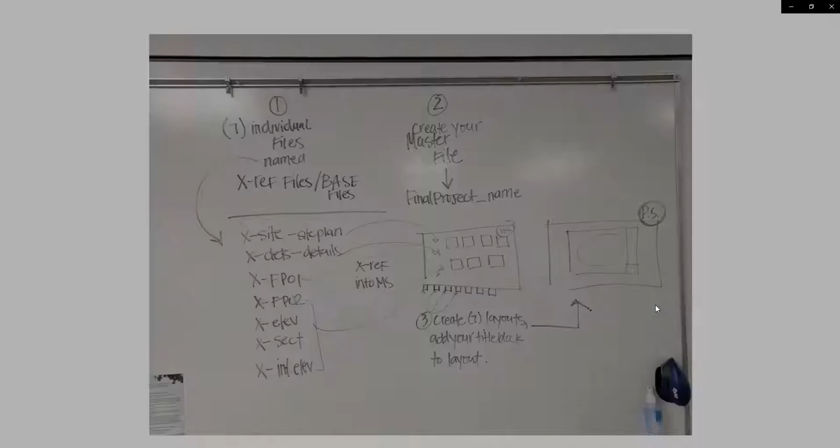Master file construction. This is just a graphic I like to put on the board before we start the final project. But I have it here now, so let's see. I'm going to hit OK. There we go. This is a little diagram of how your final project needs to work. And it won't make very much sense right now, but it will after you watch the external reference video, okay?

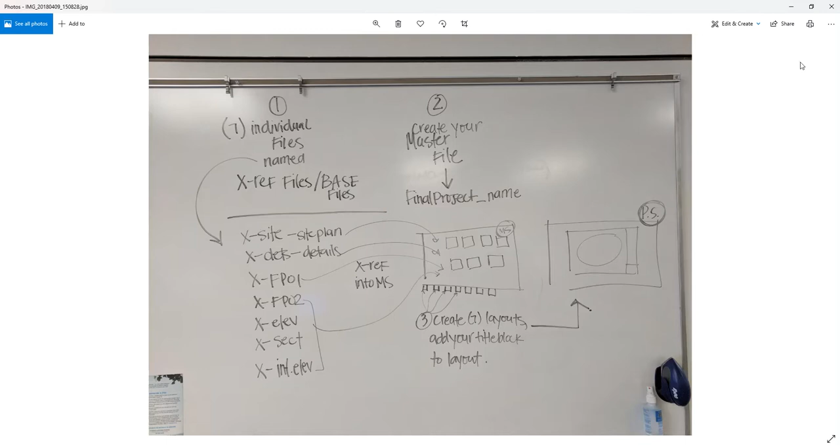All right, so I'm going to go back to our final module now. I'm going to change all of my prerequisites here. You see the prerequisite for the hatch module is 12. I'm going to change the final project to have a prerequisite of number 14, so I'm going to make you watch this video before you start your final project.

Your final project is going to be to create and draw a small set of construction drawings. There's a few things in here I want to show you: we have final project instructions, final project drawings, an image for the cover sheet, and your LaserJet CTB file just in case you've lost it.

Here's some instructions. Follow them exactly. I'm going to open these up in a second. You can print your final project from the PDF I've given you to an 11 by 17 inch page, on our printer over here—that's why I just had Jameson change the toner. It will be to scale, so if there's a measurement you're questioning, you can measure the printed version.

You're not allowed to work together on this project, although this all must be your own work. I don't mind if maybe you're working in the lab and ask a quick question, like where to find the design center or what command makes a mirror copy. I don't mind small questions, but this final project is really an out of class final test. I want you to use all of the AutoCAD skills you have to generate this on your own. You can come to me and ask questions, but I really want this to be mostly your work.

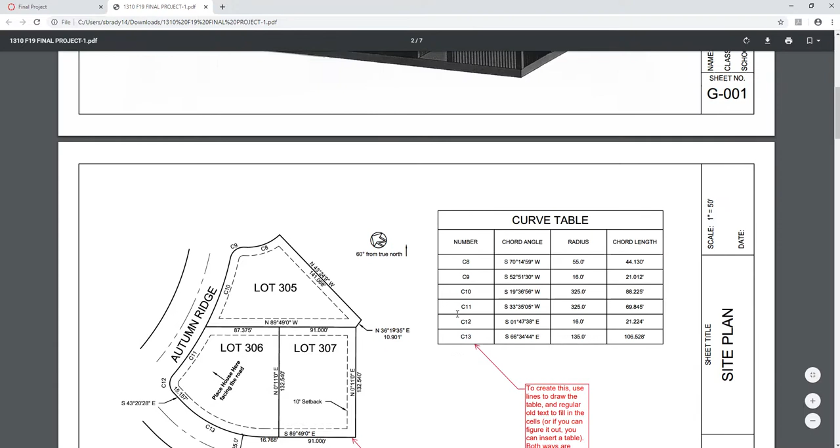You're going to draw all of these lot lines, and you're going to add all the text. Then you're going to draw this curve table. The curve table you can draw using lines - these are just regular old lines - and text. Or you can add a table if you can figure that out in AutoCAD, which, hint hint, a table is very easy in AutoCAD. I'll show you that in a second.

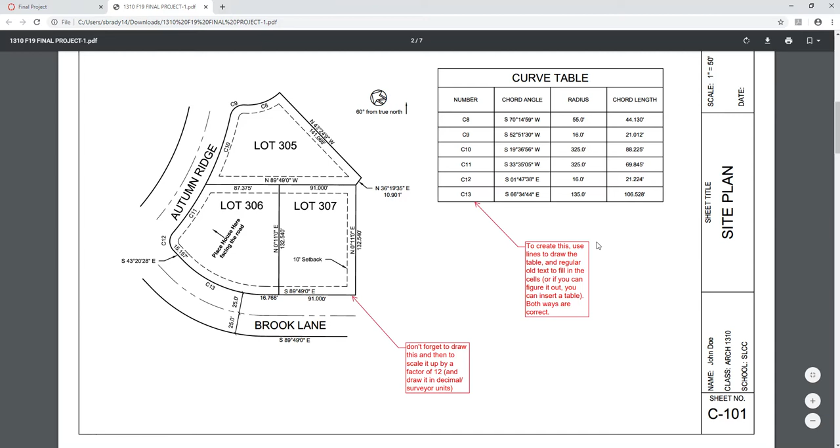Okay, I've given a little hint here too. Don't forget to draw this and then scale it up by 12, right? Here's the floor plan that you're going to draw.

You don't need to draw this door schedule here. You don't need to draw this text, and you don't need to put these drawings here. I don't think you need to have those. Just make sure you get this floor plan drawn.

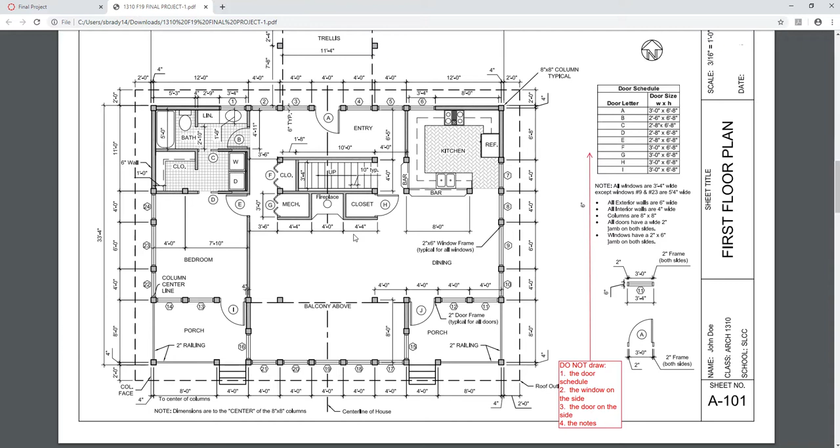This is the lower level floor plan. Here's the upper level floor plan. An exterior elevation. Here's a section. And then we have two more small drawings, an interior elevation here, and one more smaller floor plan here, an enlarged floor plan, okay?

Now you might be panicking, but let me just ease your mind here, okay? I'm going to go back to the final project module. I haven't left you completely alone. I've given you a lot of drawings to follow here, okay?

So number 1, you're going to watch the external reference video. Number 2, you're going to start at the top here. Here's some hints, but you're going to start at the top, how to draw exterior and interior elevations, right? So that you have that.

You're going to watch this video. Then you're going to watch AutoCAD Final Project, how to construct your master file. This is going to get you started on the final project. AutoCAD Final Project, drawing the exterior elevation.

AutoCAD final project, drawing your floor plan. Actually, let's switch those. Draw your floor plan and then your exterior elevation.

Okay? Yep. Whenever I click on those, they actually don't show up on my canvas. These don't. Oh, are they? They don't. No, they have like a little paper with a sad face on it. Oh no. Okay, I'll check the links because.

Oh, maybe click on this right here. You might have to go to YouTube. Is that the problem? Maybe. Okay. Yeah. Did that work? Okay. Okay, I think yeah, okay.

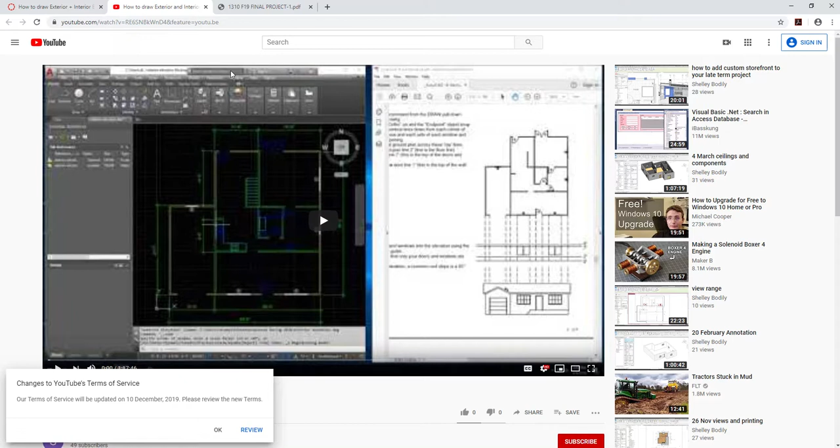So just make sure to click on this up here, how to draw, and it will open up in a secondary window. But if you watch all of these, all of these things are going to run you through how to create this final project.

Really, I do the same process every single semester, and every single semester everybody does really well with this final project. But let me just kind of show you again, the first one is to do your external reference video. Watch that. Hints about the final. There's just one hint in there so far.

In one of the videos, we've done the blocks a little bit differently in the attributes, not quite converted to annotative AutoCAD. So if you see me creating text, dimensions, or attributes and they are not annotative, ignore that and just do it the way we've done it in class. Okay, so that's one comment I want to make.

Let's go back to our module here. You're going to start here, and this is going to show you how to XREF your entire master file together. Okay, so these are, I think, about an hour long.

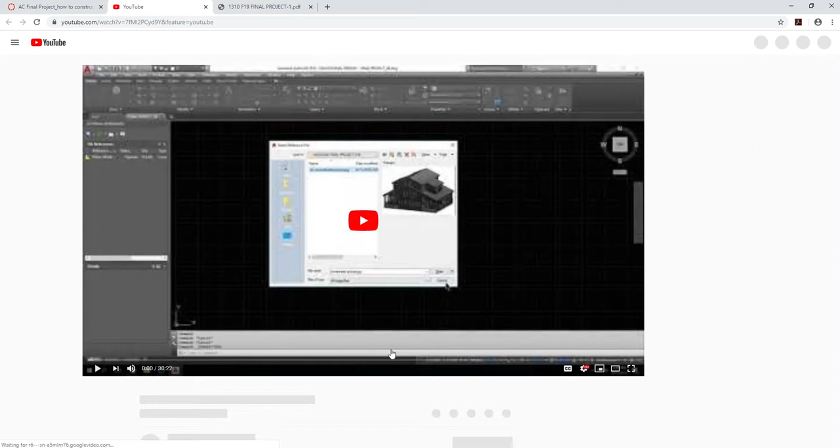Maybe a little bit, hour and 20 minutes. This one's 30 minutes. It didn't take too long. But this shows you how to XREF all of your files together to get your master file going. Okay, so step 1.

Step 2, let's go back. Okay, now that I have my master file constructed, how do I draw my floor plan? So they have an hour, I think this one's actually almost an hour and a half because I point out a lot of things. Oh no, it's the next one. This one's 58 minutes, I trimmed it a little.

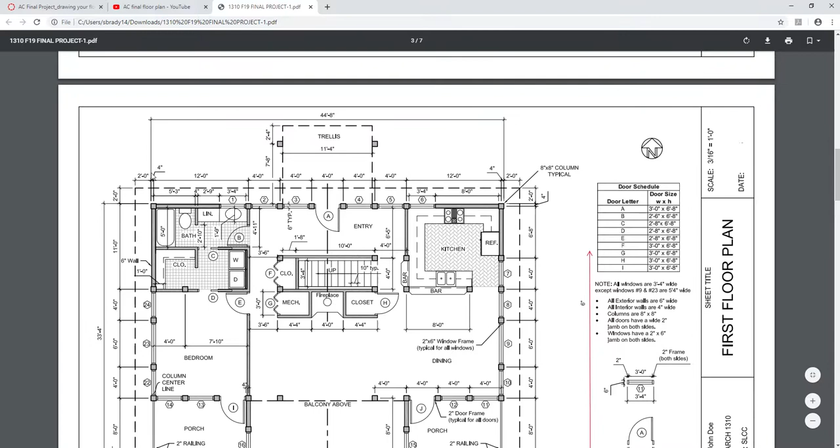But I start basically showing you how to go about not only drawing this floor plan, but thinking about how it goes together, okay? Because this project, if you look at all of the different dimensions in the project, it's based on a 4-foot grid, okay? And so I'm going to show you how to draw that using that 4-foot grid and how to think about going about drawing this, okay?

And then we have the exterior elevation, right? That one probably panicked everybody. So how to draw your floor plan and then how to draw your exterior elevation. And this will help you.

Oh, I have one more video to post that's not on here. So, hey, how do we go about drawing this? Well, once you have your floor plan drawn, drawing this is very easy, okay? So I'll lead you through that.

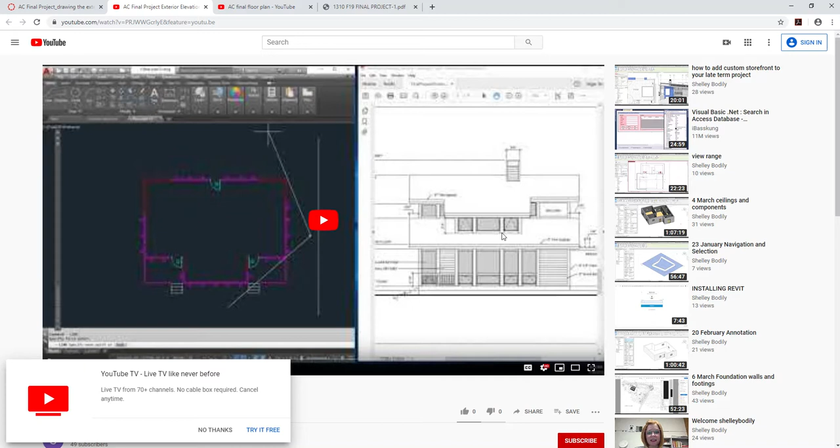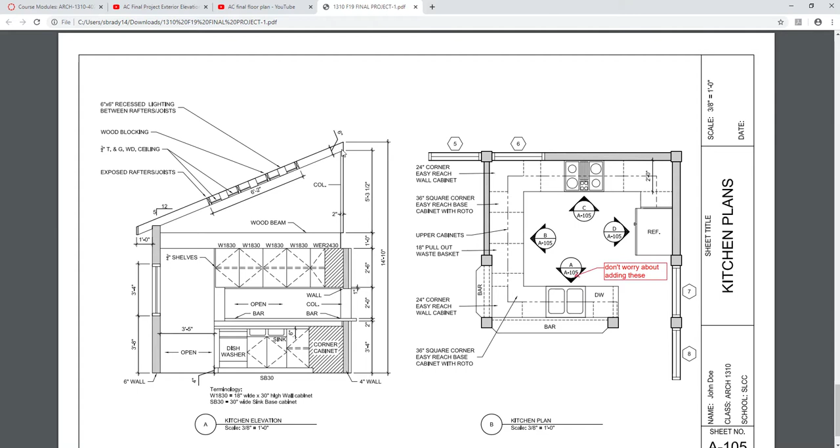And then I actually have one more video I'm going to post on here. It's kind of the final in these, but it talks about how to draw the interior elevation, and how to go about drawing these two things, okay? So these videos, they don't complete every task, but I will show you how to get started, what layers to use, and then get the basic outline of most of them done so that you're on your way, right? And then you can finish it up, I think, fairly easily, okay?

Does anybody have any questions on any of this?

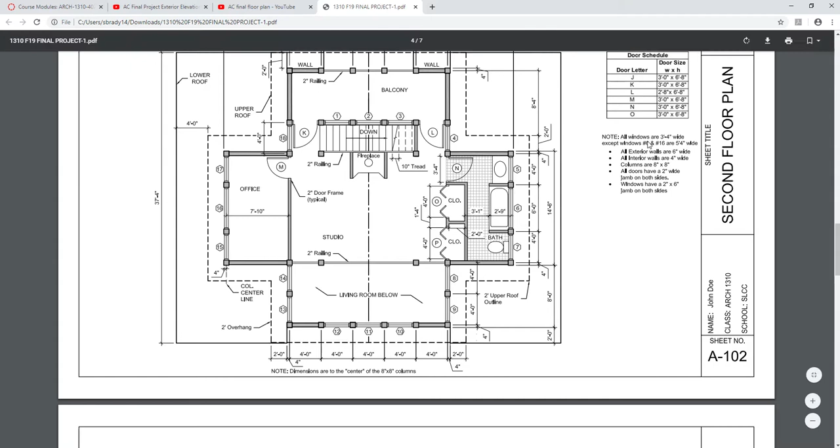Madison, looks like you have one. I just wanted to make sure on the lower elevation, do we also need to draw the chart? No, these right here? Yeah, nope. I just want to make sure because it doesn't say anything. Yep, I wasn't sure. Nope.

And I can make that clarification. You don't need to draw any of these notes over here on the side. I'm fine with you focusing on getting the architecture done, right? So don't worry about doing any of these. Yep, none of those notes.

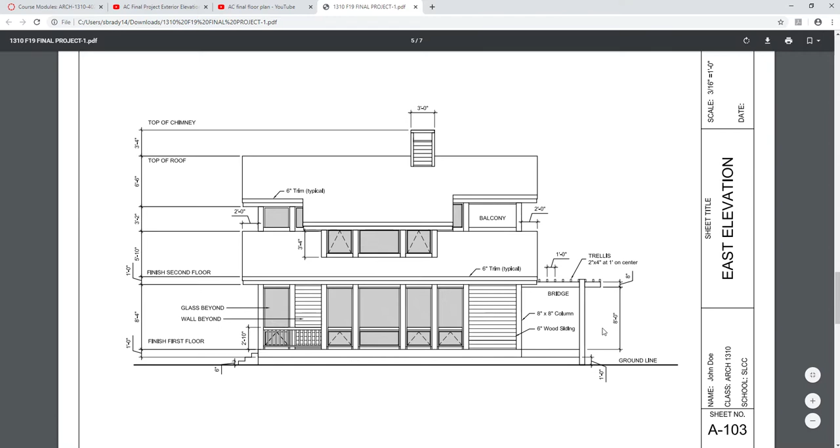But you will want to add these dimensions in, and these little notes right here, we'll add those in, right? And you will add all of these in using leaders, okay? And you don't need to add these markers in. We don't need to do that.

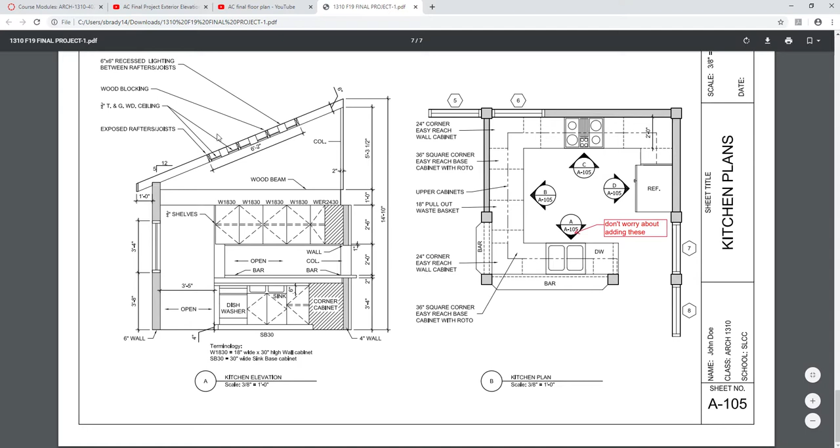And I talk about this in the video, but this really is just a copy of the floor plan, right? So you're not redrawing this, it's just a copy of the floor plan. And here you do have some leaders that you have to create, but that's it. I mean, you'll draw it, do the leaders and the dimensions, but nothing else off to the side.

Okay, so this looks like a lot of work, and it is, okay? But don't, again, I do this every semester and everybody always does really well. And I think that if you really just start here with this video and you proceed through all of these in order, okay? And I'm going to say this and I'm going to laugh because I was a student also at one point. And if you don't procrastinate,

then everybody always does really well, right? So I would get started very quickly just by watching this first one, and then again moving through all of these. If you need to print this final project, okay, if you want to print this, you can print it on that printer. Print it 11 by 17, Control P.

Okay, one thing that you will want to make sure that you do is, where is my printer? 301B, there we are. Are we 301B? I thought we were 305. Hold on one second.

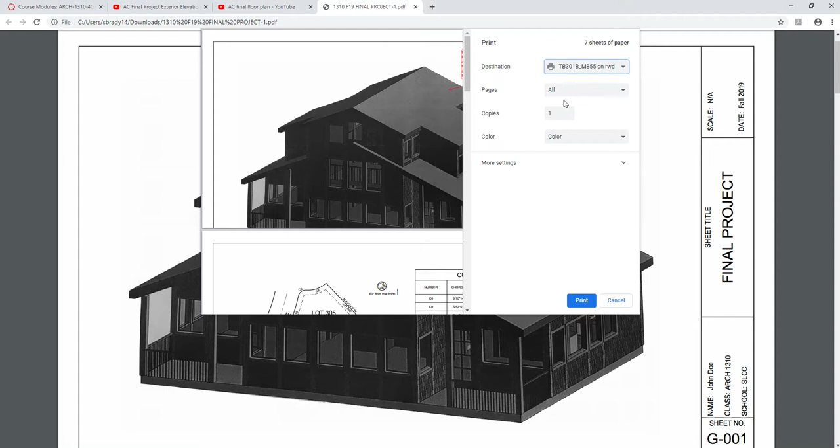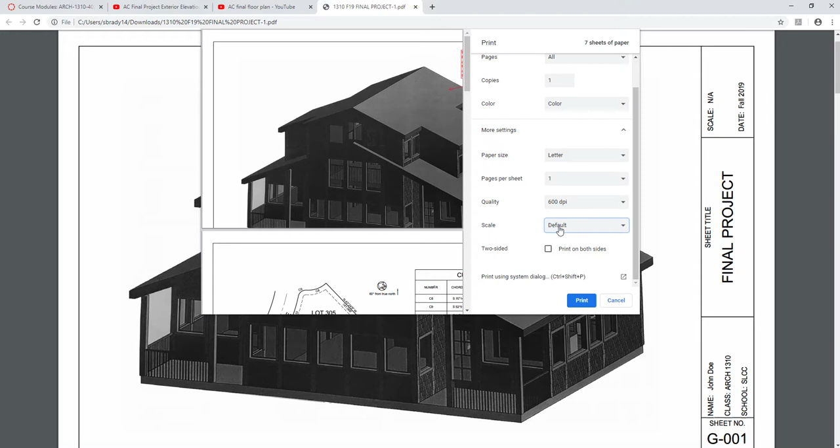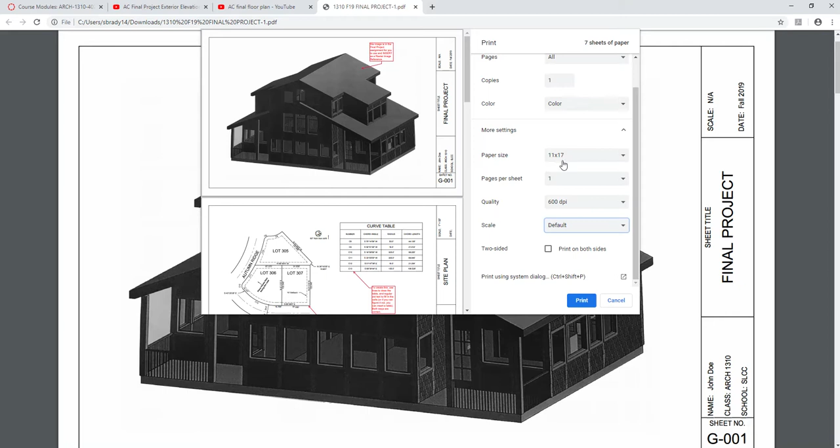But when you go to print, one thing that's pretty important is when you choose scale, it says default. I would choose default or none. You want this to print the exact size that it is, and it's going to be an 11 by 17. So if you want to measure it to get different measurements, you want it to be 11 by 17 and you want it to be default. You don't want to hit fit to page, because if you do that, it will slightly skew how big it is, and if you measure it, the measurements will be wrong. So 11 by 17, default or none, and then just hit print, and it should print, but I think our printer's not working, it's offline.

Any more questions on any of this? Okay. Again, I've said this about 4 times, but don't panic, right? It is a lot of work. But the videos really lead you through it, okay? They get you started, they get you on the right track, started in the right direction so you don't start doing something and it's wrong.

And then I will be here. I'll start, like I said, every Monday and Wednesday from now on is considered lab time, okay? So I will be here. I'll come in at the time class starts. I'll just talk with you all and see if you have any questions, and I'll answer any questions that you might have. And then I'll probably be in my office doing things, coming back and forth, just checking on you, okay? But I think you'll have plenty of time to get this done without any other assignments due.

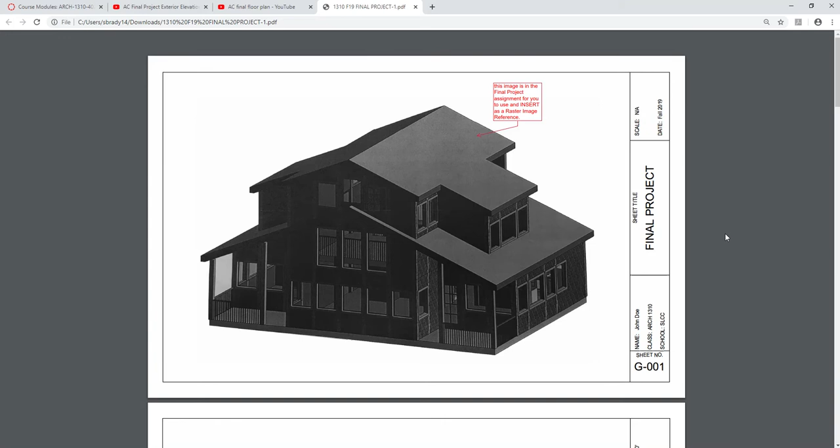Any other questions? You've done this project a few times, haven't you? Is it easy? Yeah? It's a good one. It's a good one. I'm working on it now. There you go. There you go. Okay. All right.